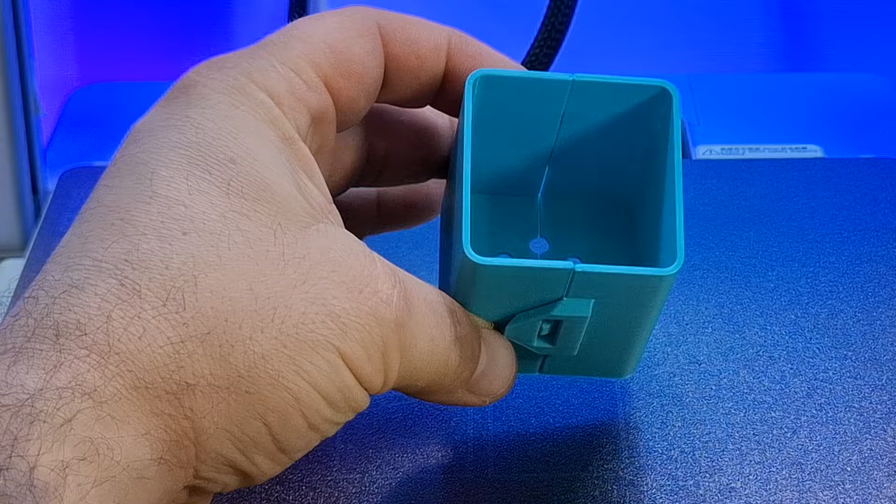In this first video of the series, I'll be designing a seedling starter pot that splits in two halves. The idea is to make replanting much easier later in the season without damaging the roots or stressing the plant. So instead of squeezing the pot or pulling the seedling out, you simply open it and lift the plant out

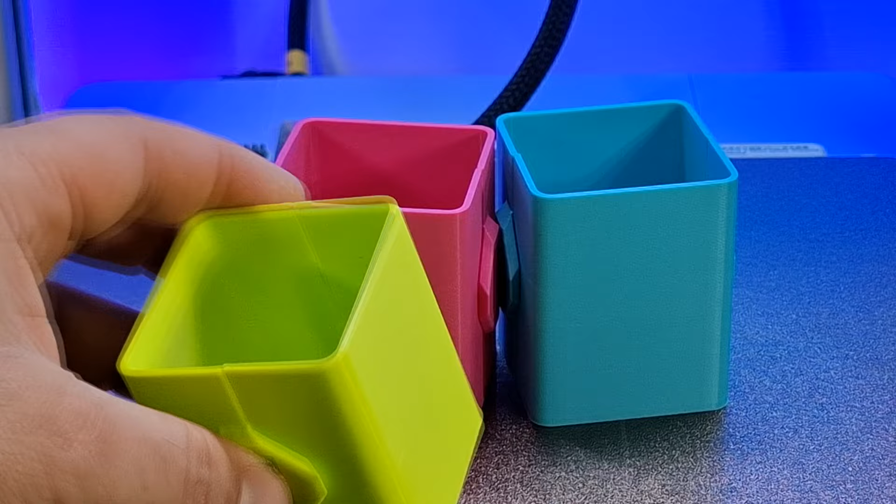gently. The pot is held together using simple snap fit clips, which keeps the two halves secure during use, but also allows you to open them easily when needed. So let's jump in Fusion 360 and start designing.

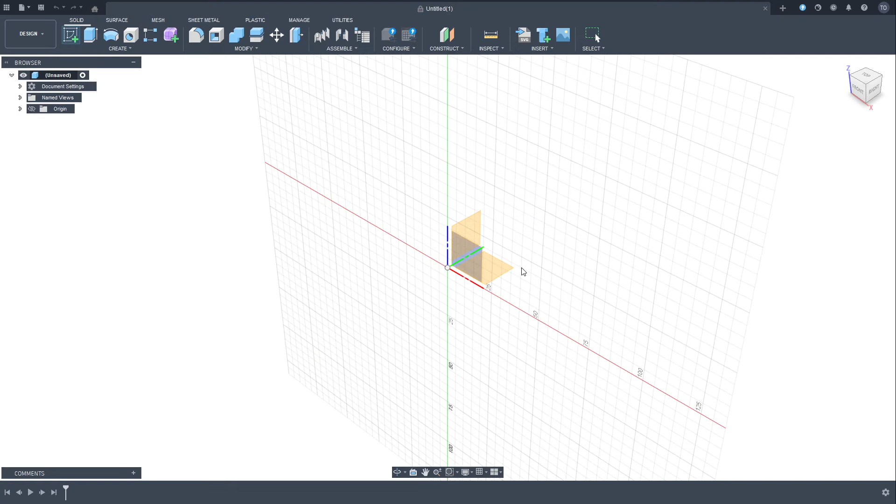So here we are in Fusion 360, and I want to start with a new sketch. I'm gonna do the sketch on my top plane. From here, I'm gonna choose a 2-point rectangle. I'm gonna start in the middle and call it 50 by 50 millimeters. Now let's fillet the corners to make it look a bit better. I want to do maybe 5 mil on each corner.

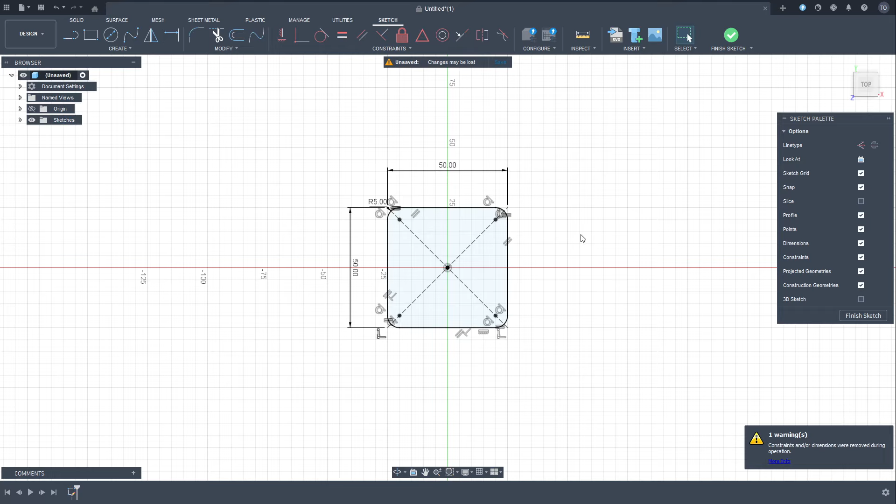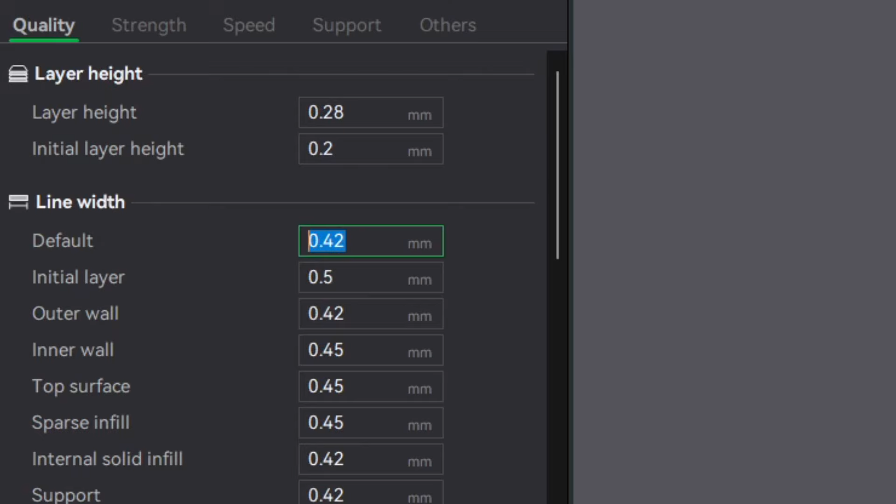Now I want to offset this to create an edge. I want to offset it by 3 or 4 times the size of my line width on my 3D printer. So if my default line width is 0.42, I'm gonna choose 1.68. That's 4 times my line width. So in that case, I will get 4 different clean lines to get a quite solid body.

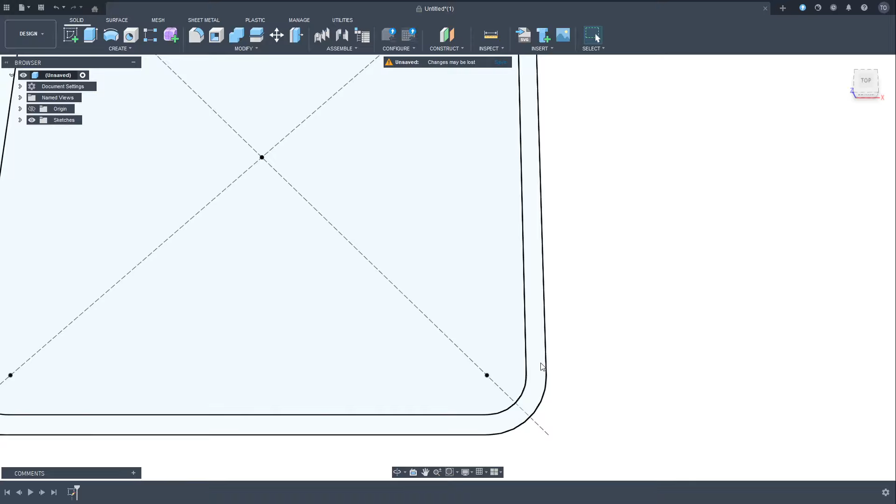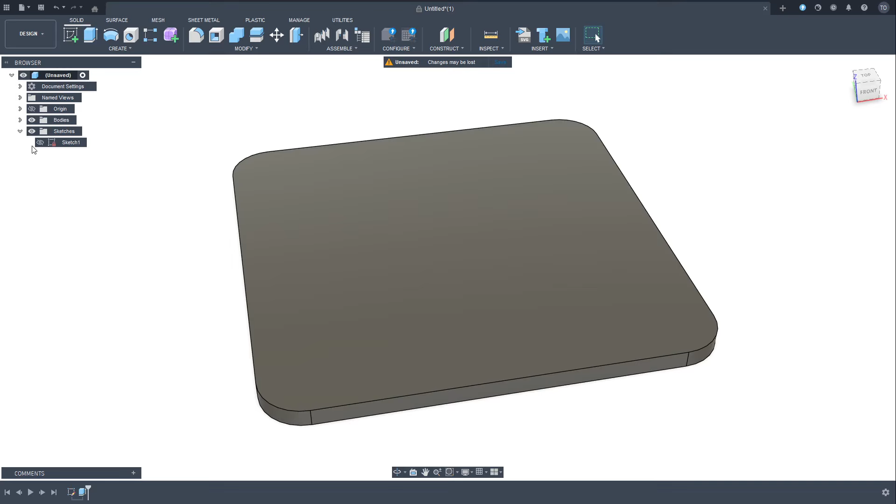Okay, so I'm gonna say finish sketch, and I want to extrude both of them. I'm gonna hold shift, select this area of the sketch, and then select this other area of the sketch, and I'll firstly extrude by -2 millimeters. That will give me the bottom of the pot. Now if I make that sketch visible again and choose this area of the sketch, I want to extrude this by 60 millimeters, and that will give me the whole size of the pot.

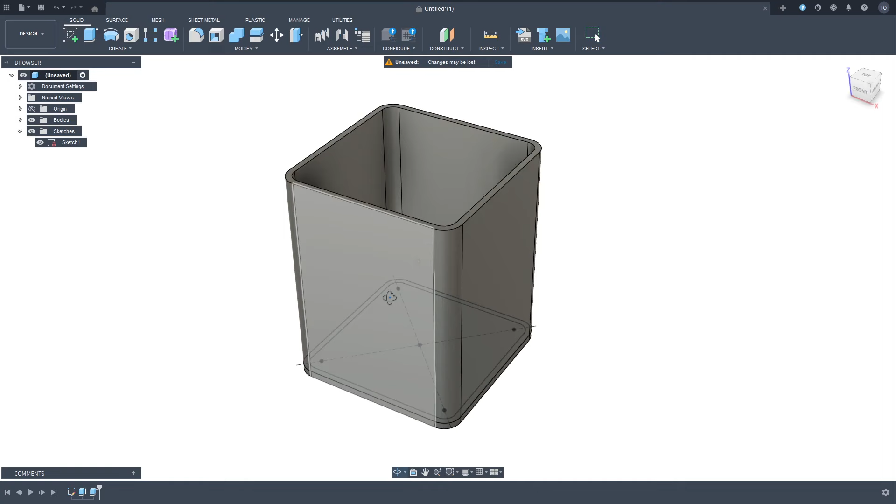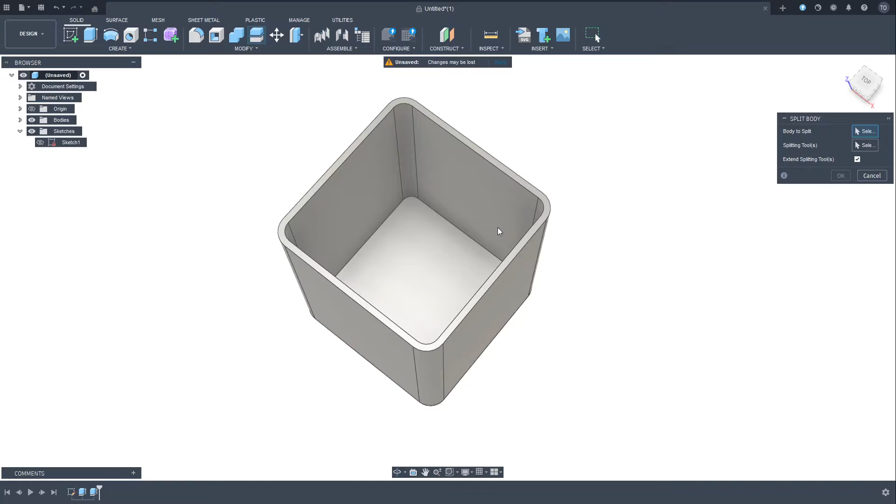Okay, now this is the full pot at the moment, but it is one unit and you can't split it in half. So let's split it in half. I want to go to this tool called split body, and select the body first. That's my body to split, and I want to select the splitting tool, one of these planes. Let's choose this plane, and that'll give me a clean cut right in the middle of the pot, and I should have 2 bodies.

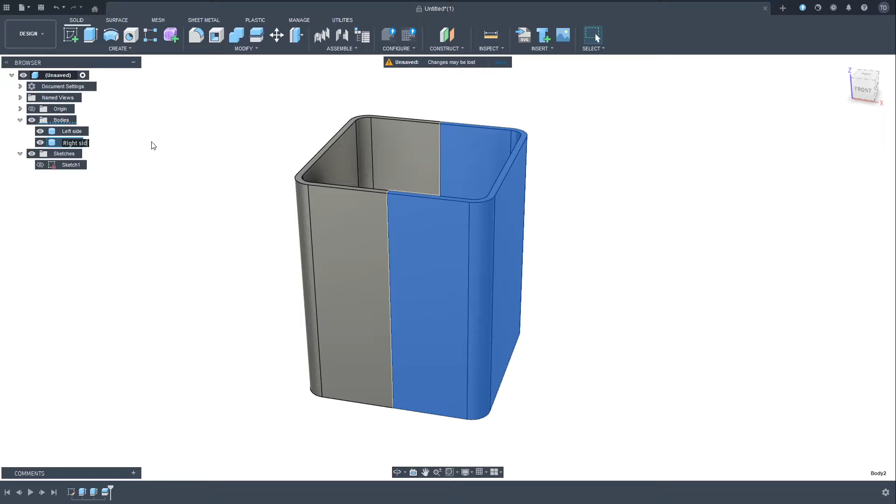There you go. Let's rename them. I'm gonna rename this left side, and I will rename this right side, just so I know which one I'm working on. Let's hide the right side for the moment. I only want to work on the left side.

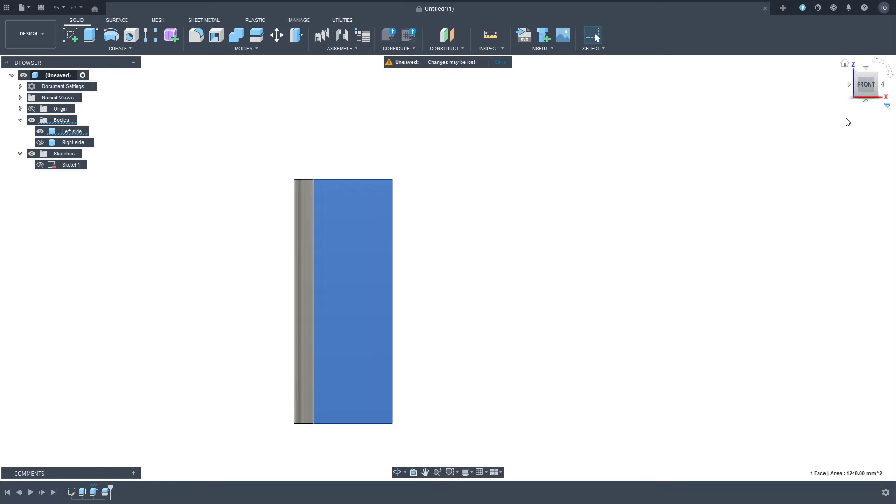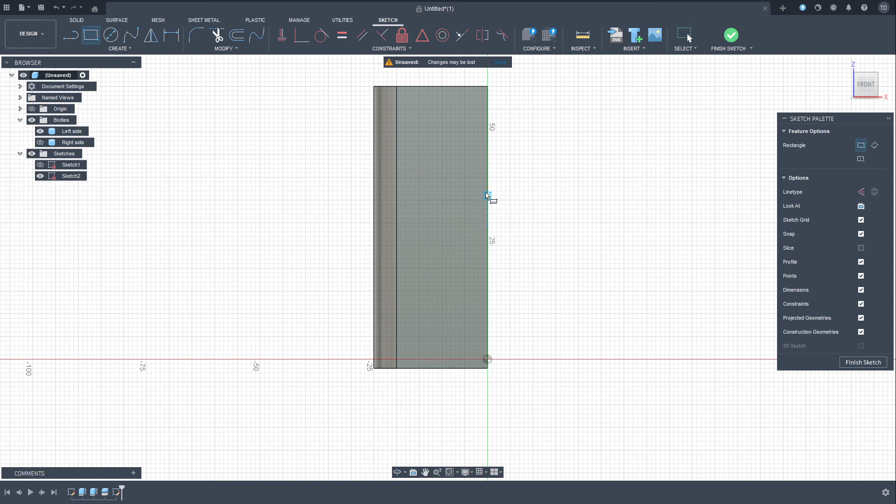I'll have a look at the front section, and I also want to look at the orthographic view. And let's create the first bit of the snap clip. On the left hand side, I'm going to create a new sketch onto this bit of my design. For the first bit of the snap clip, I'll simply create a rectangle, 10 millimeters by 4 millimeters. There we go. That's all I need to do in this sketch.

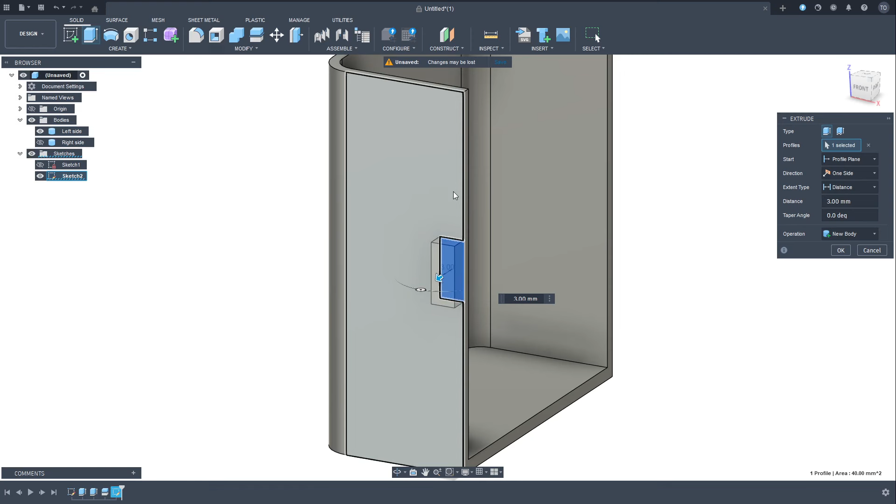Finish sketch. Let's extrude this rectangle by 3 millimeters. As an operation, I want to create a new body, because if I intersect this, I won't be able to mirror it on the other side. But if I create a new body, then I can simply mirror whatever I do onto the other side, and it helps me with my workflow.

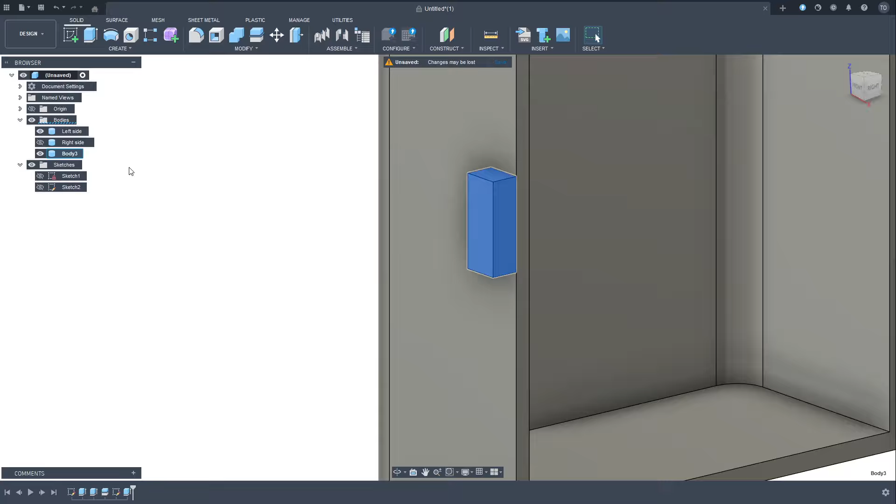So just say okay to this, and now I have this body, which I'm not going to rename yet because I will connect everything to the left hand side once I finish. That's my new body. The first thing I want to do is create a way for it to not be printed in air, because at the moment, this whole section will be printed in air.

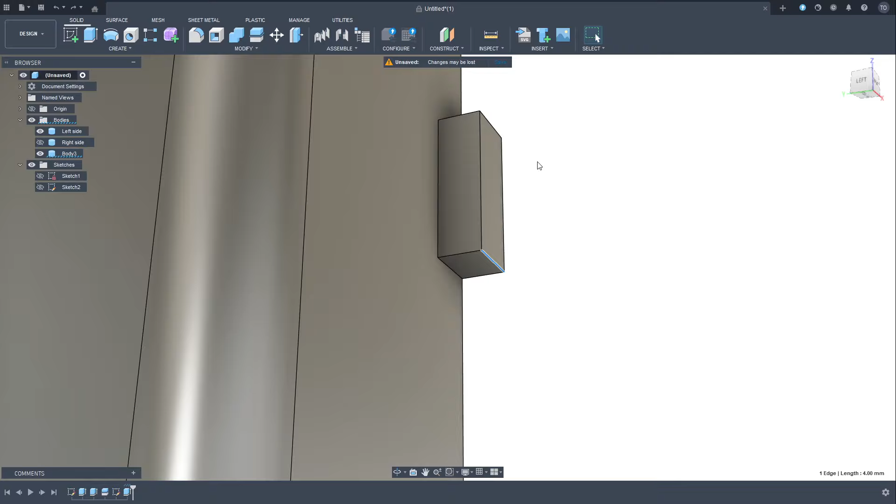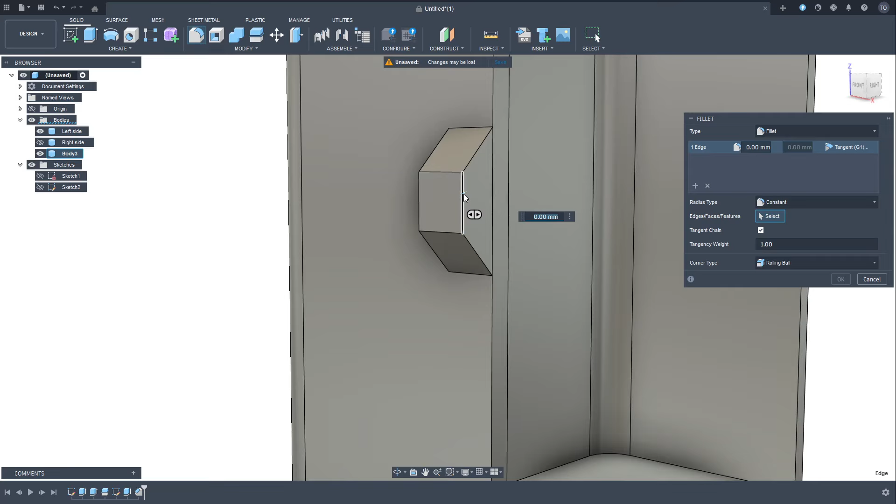So I want to select this line and create a chamfer. I'm going to go all the way down and say okay. Now this is my first bit of the clip, and I also want to make this snap on easier. For this one, I'm going to just create a fillet, and I will go all the way to there. Okay, so now when I 3D print, it won't print in the air, and it will make things snap on easier.

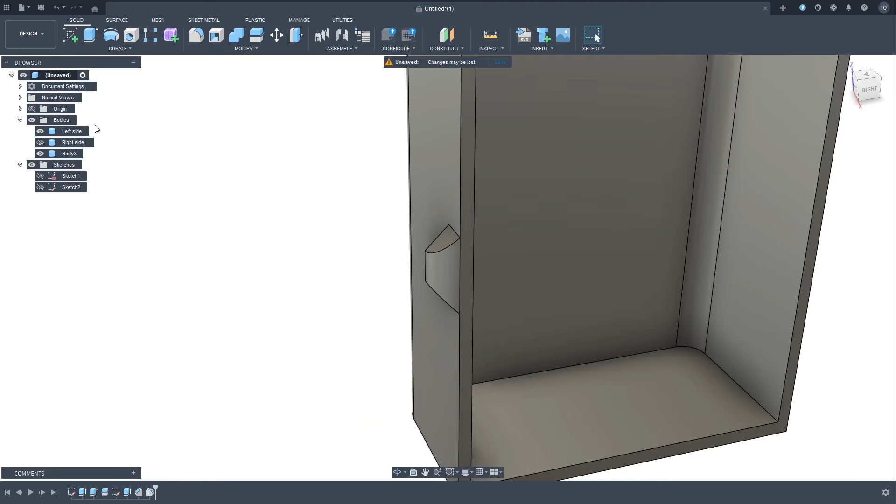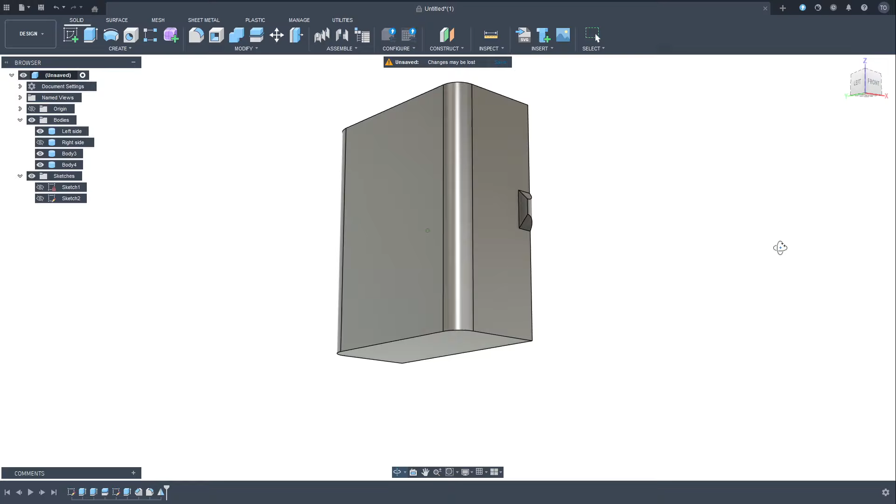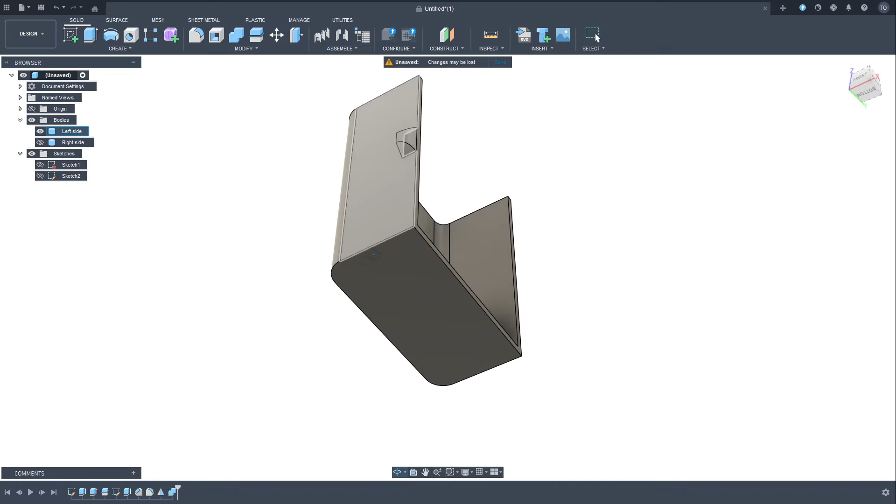Let's mirror this body onto the other side, so we have the same thing on each side. I'm gonna go to mirror, select mirror plane, this one, and say okay. There we go. Now we have those clips on both sides. Now we can simply select all of them, combine everything into one body and say okay. So now we have the left hand side with both clips, and the right hand side with nothing.

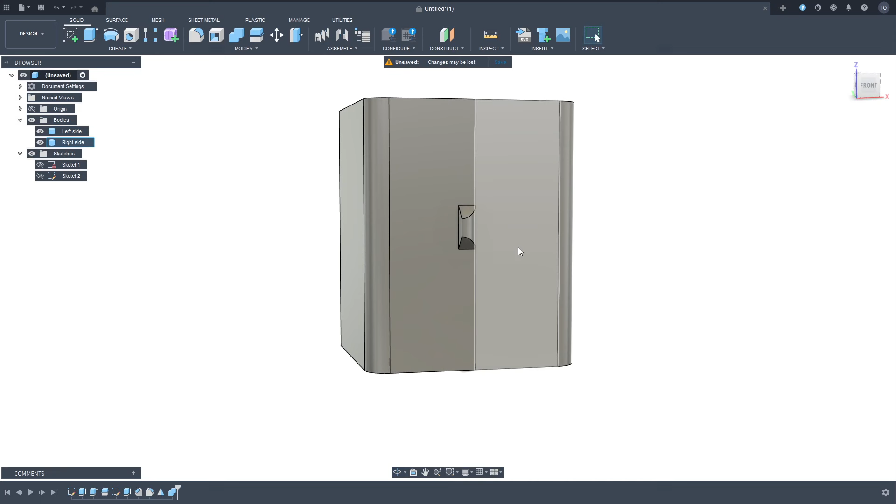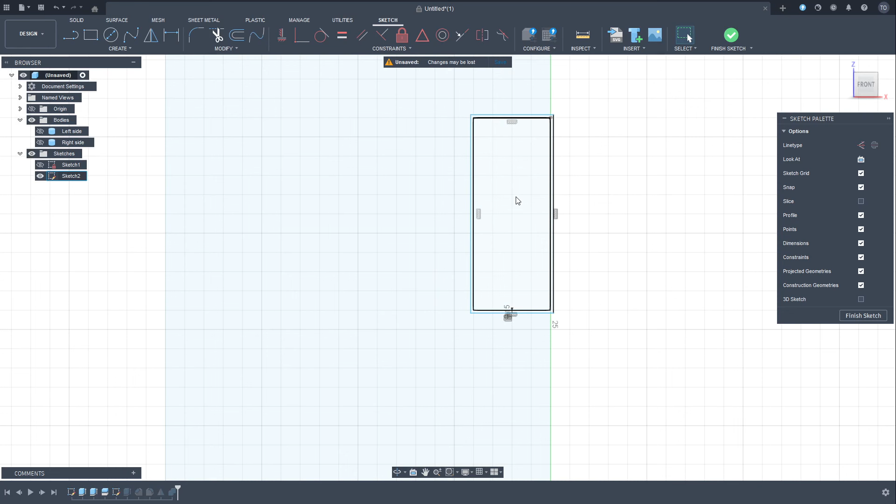So let's create the other side of the snap clip. So I'm going to hide both sides, and I want to see this sketch and go back to edit it. Now this is going to help me create the rest of the snap clip. So what I want to do is I want to select all of this, and I want to offset everything by 0.15. So that will give me a little bit of a clearance between the clip which is on the left hand side and the clip which is on the right hand side. Because if you make them the exact same size, you won't be able to snap fit them together.

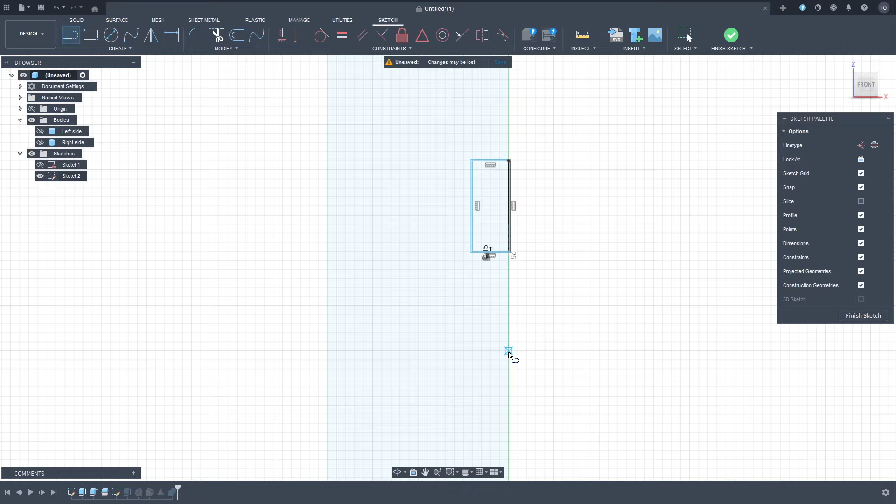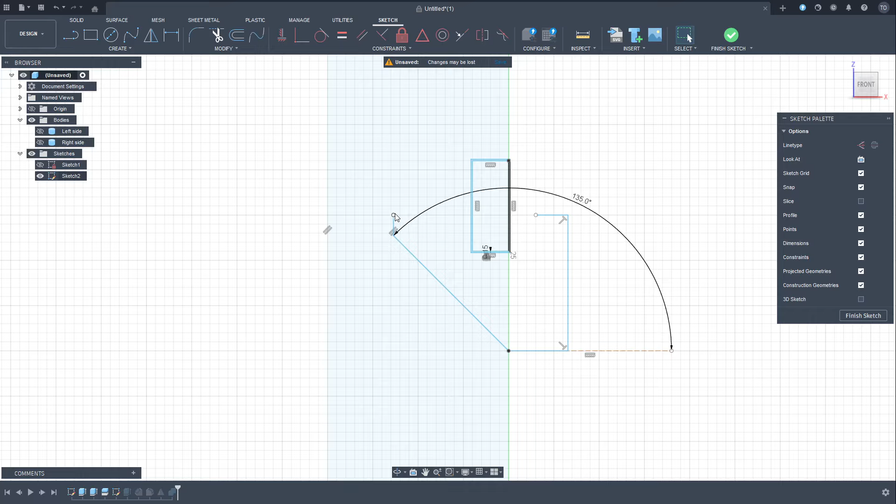Now I also want to make this easy to 3D print with no supports. So I'm gonna create a line from here, and I'm gonna go to 135. And let's make another line from here. Let's say go up. I want to make one more line here. Now I need to do one more up to there, and I think that should be everything I need. So now I'm going to simply select these lines and then mirror them according to that line.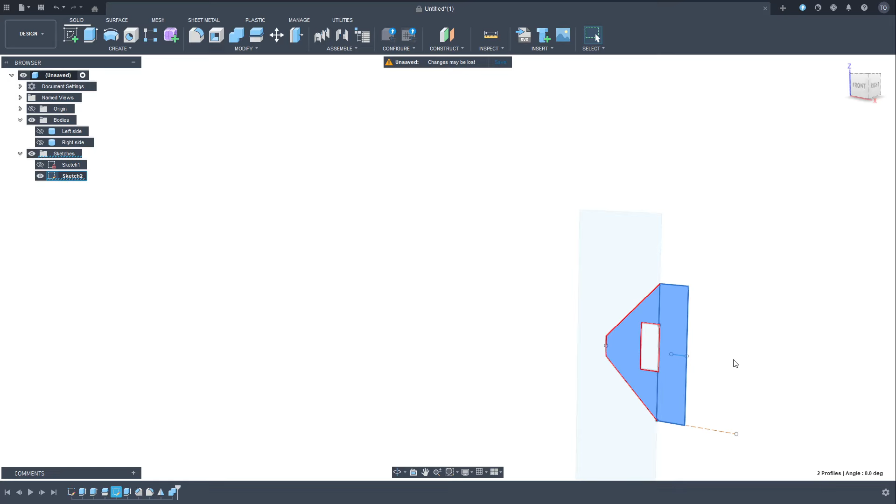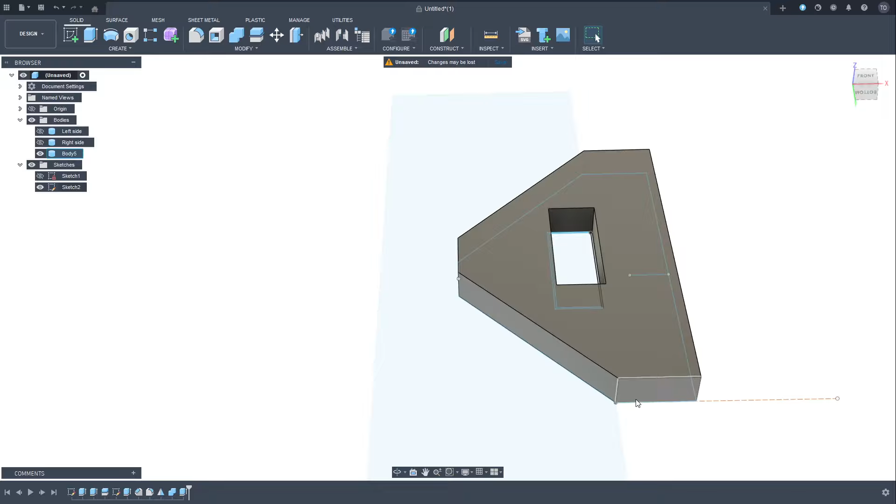Okay, that will give me a whole section which I can later on extrude. So let's finish sketch and extrude this. And I want to extrude it by, again, 3 millimeters. Okay. Right, now let's see the parts which will be printed in air. So I want to make sure this bit is not printed in air, so I'm going to select these two and chamfer them so they won't get printed in air. I'm going to chamfer them by 3 mil.

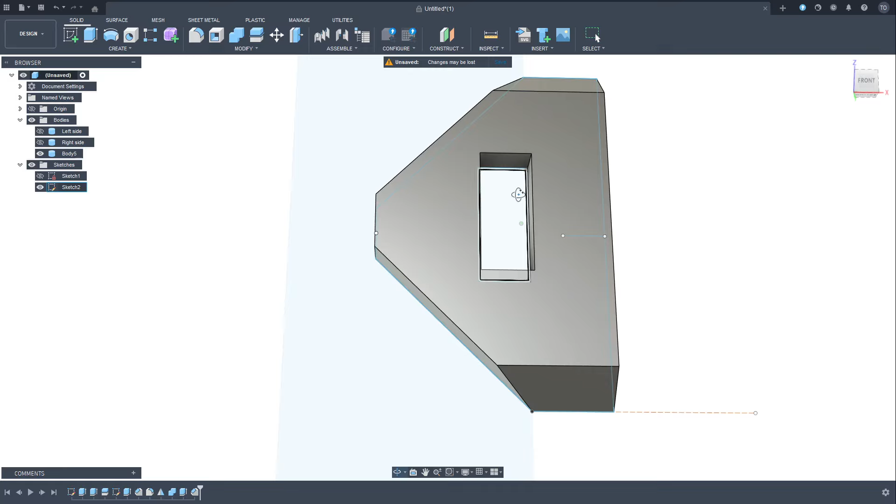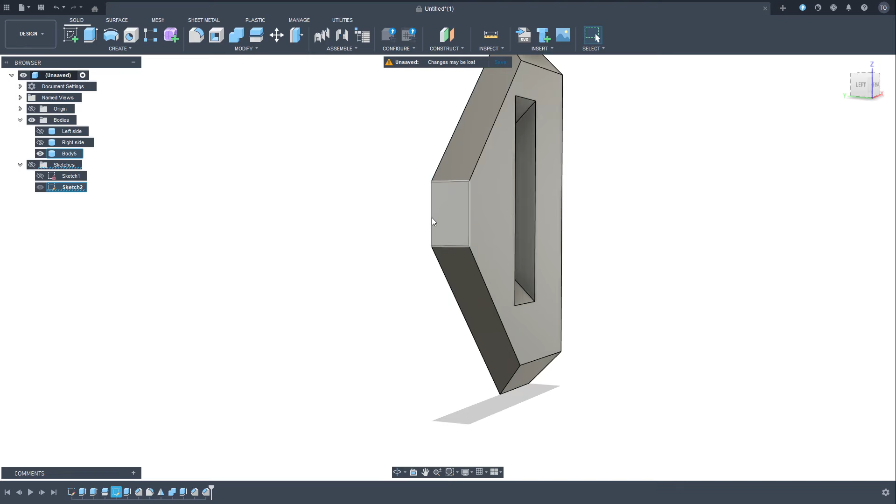Okay. Now this and that, I will chamfer them too as well, because again we don't want to print them in air. I'm going to chamfer them by 3 millimeters, and we're also going to chamfer this section. Okay, let's hide the sketch. And we want to chamfer this section. So the reason I'm chamfering this section is I can easily get my fingernail underneath when I want to remove the clip.

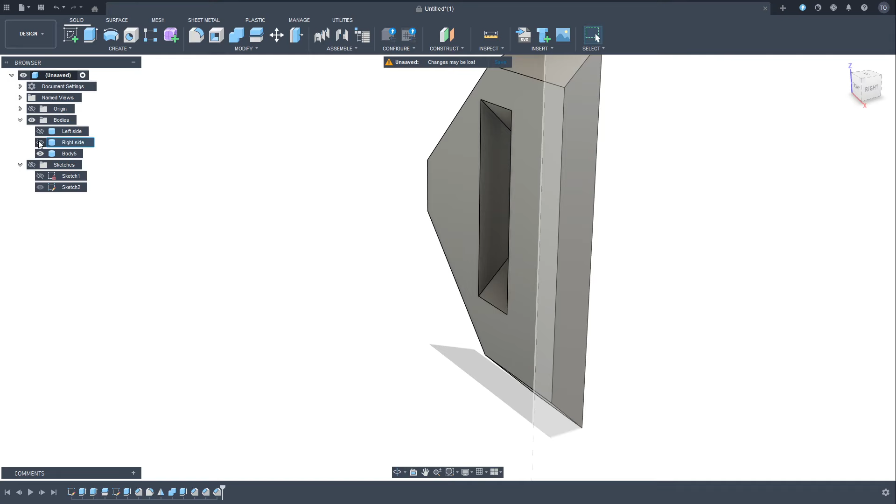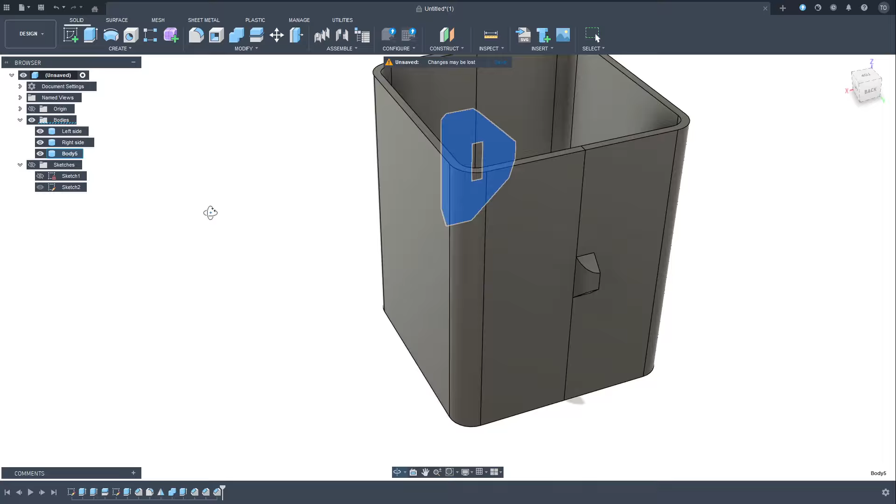Okay, so that's our snap fit clip. Let's have a look at how everything looks. That looks really nice, and I think it will work pretty well. That's it. That's the other bit of the snap fit, and I want to mirror it to have one on the other side as well. So I'm simply gonna create a mirror. I'm gonna select the mirror plane, this one. That will give me another one on this side. Okay, so now we can select all 3 of them and combine them.

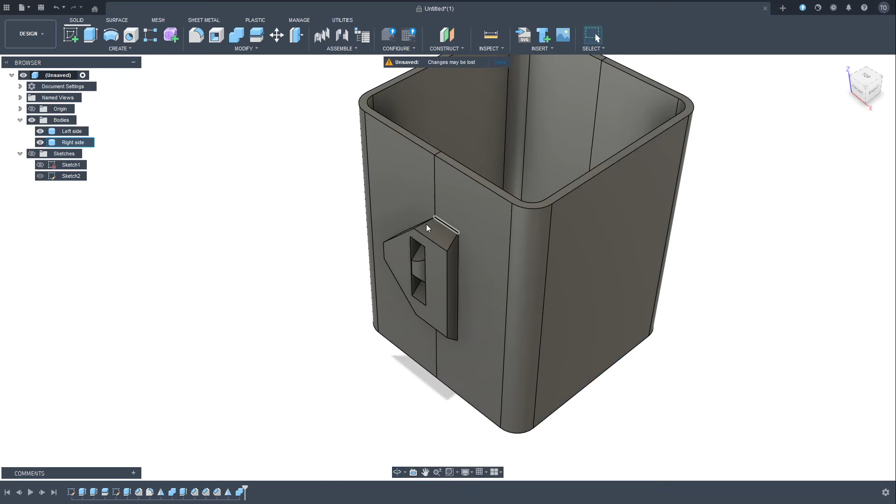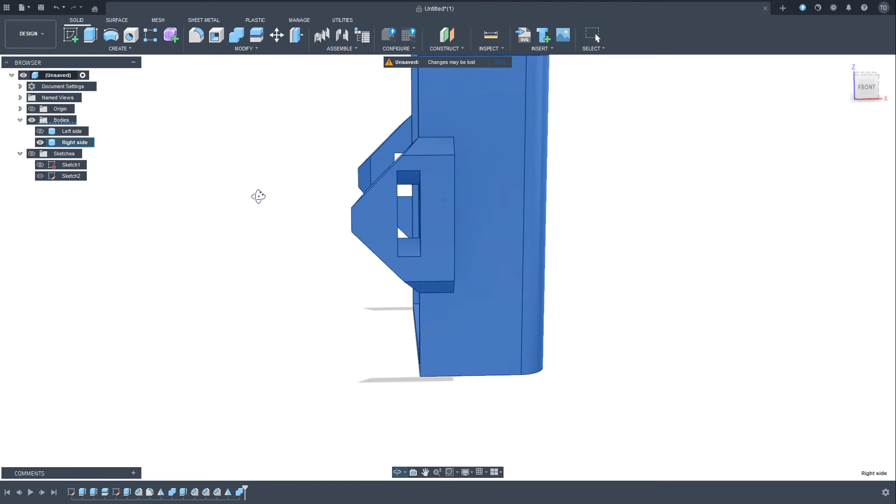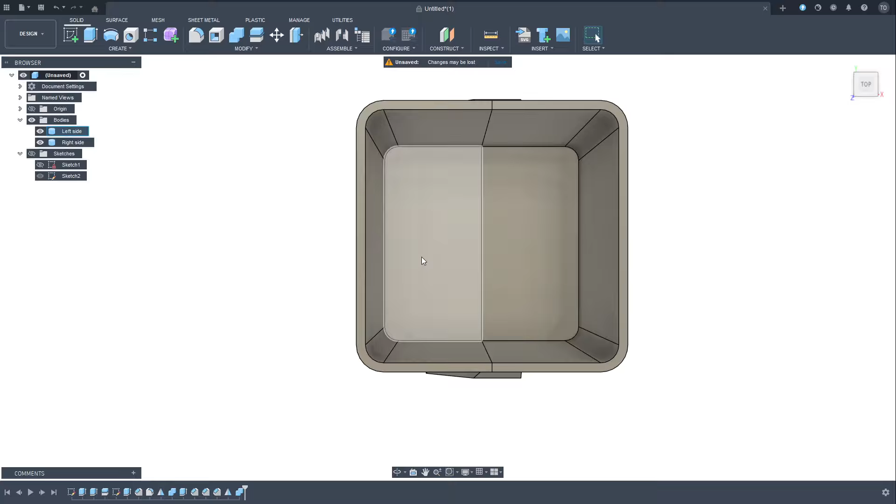Okay, so now we have the left hand side with its own clips, these ones, and we have the right hand side with these clips. So everything here should be printing with no support. So we will make the print easier and faster. One more thing I want to do before we finish this design, I want to create some drainage holes so we don't flood our seedlings, even though we have a cut here and probably water won't stay in anyway. I like to create some drainage holes anyway.

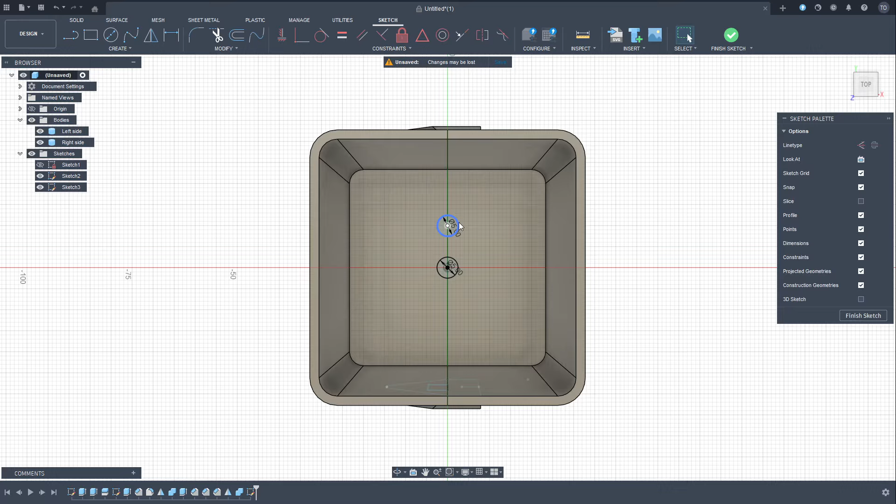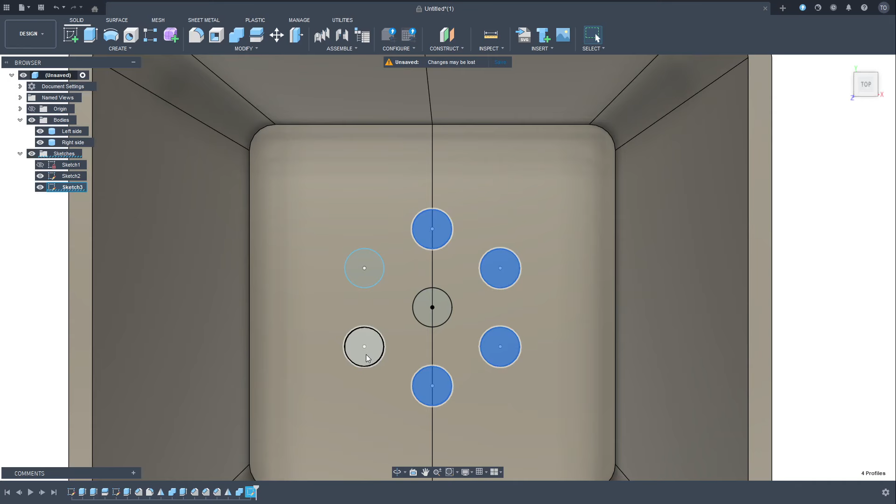So I can do that by creating a new sketch on this side. And I want to create a 5 mil hole here, and I want to create a few more around it. So I'm gonna simply make another one and create a circular pattern with a center point here, and I want to make 6 of them. And if I finish sketch and make this sketch visible, I can select these and just say extrude down. So that's it for designing. Let's send it to my Bambu Studio and slice it and see how that's gonna look 3D printed.

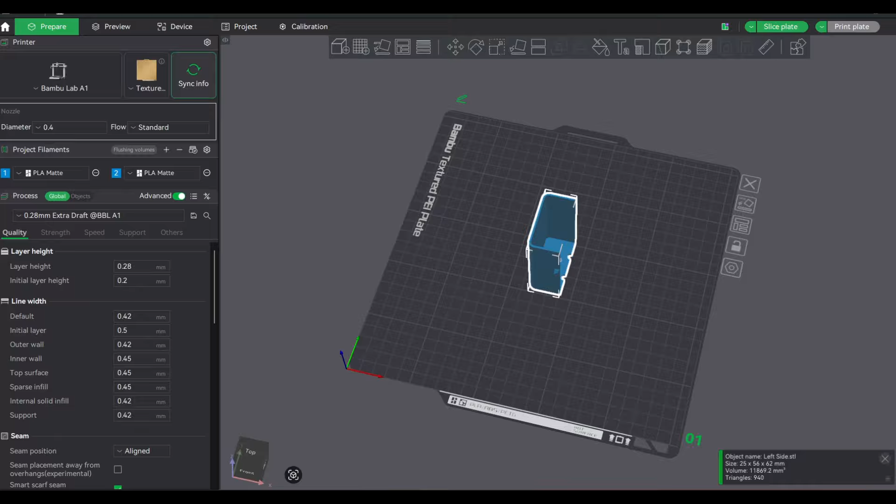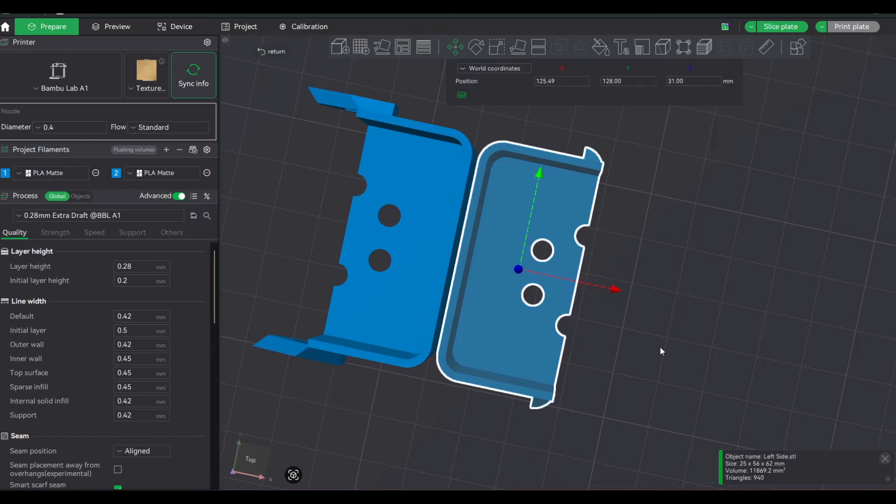So here is my Bambu Studio, and let's import both sides and see how they look. I want to put them back to back, so when I print them there's gonna be a minimum distance between them. Okay, and I want to do a layer height of 0.28, which is kind of the largest layer height for a 0.4 nozzle. It's called extra draft, which gives me not such a good quality, but for this type of print quality really doesn't matter that much. So I'm going to use it as a speedy print.

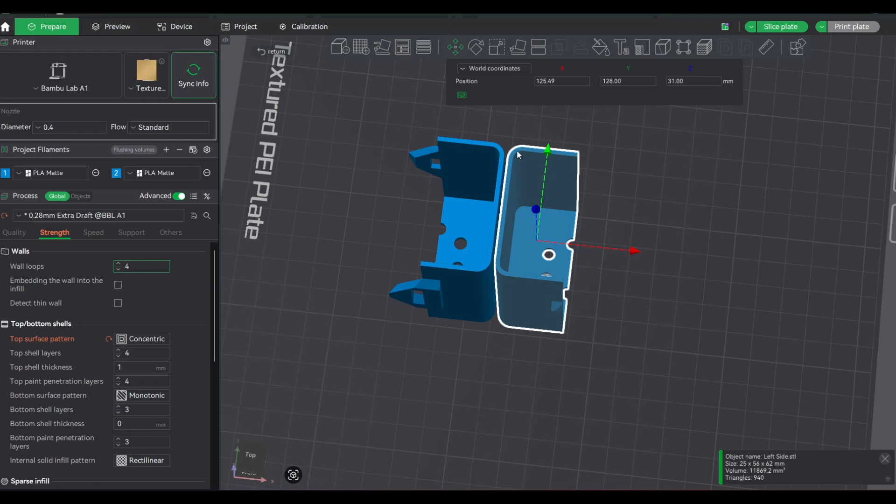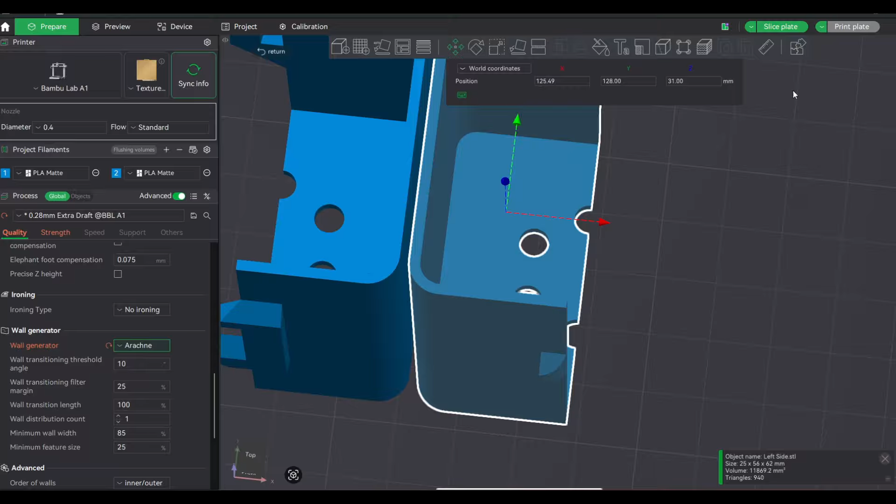I want to do infill density 100%. Okay. And I want to do wall loops 4, because as I said before, I have 4 walls here. I've designed it as 4 walls. And one more thing I need to sort out is I want to change the default wall generator from classic to Arachne. That will produce walls with a variable extrusion width, and you'll have cleaner printed walls. And let's slice and see how it looks.

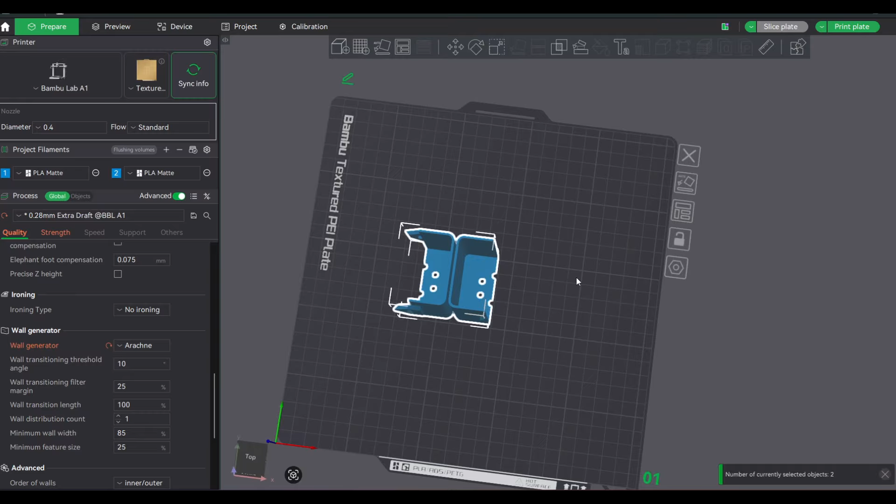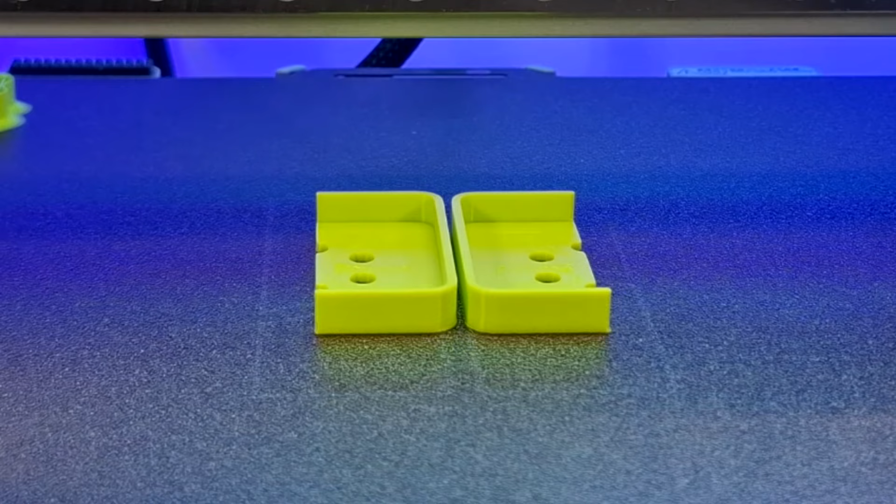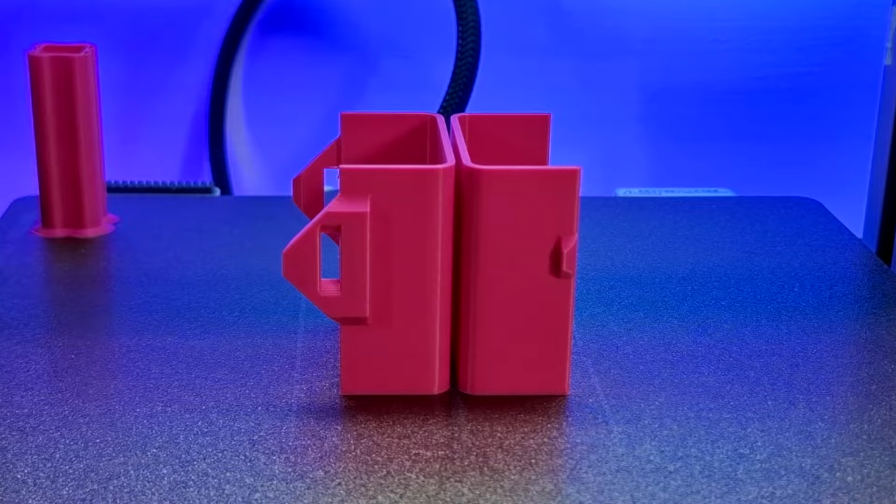That's it. The only thing I want to do is place both of them in the middle. And this is simply because of the time-lapse video, and it is not very important where you put them. That should be fine. And slice one more time and send it to print. Let's see how it looks. This is it for this video. This is my reusable seedling pot.